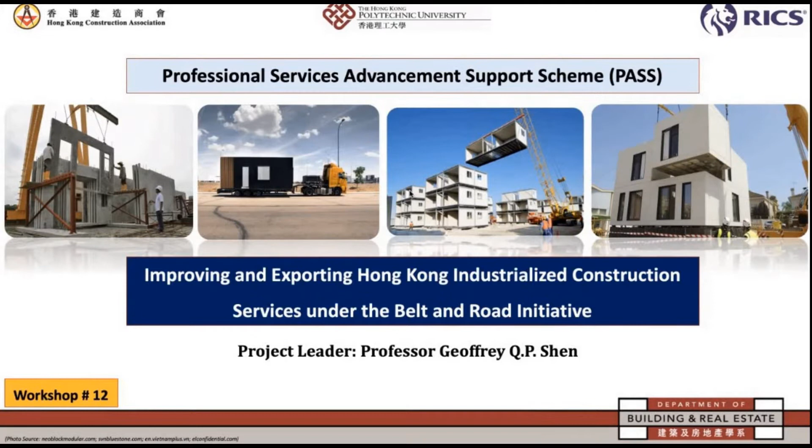This project is funded by the Professional Service Advancement Support Scheme of the Hong Kong SAR government. It aims to improve and export Hong Kong's industrialized construction service under the Belt and Road Initiative. It is sponsored by the Hong Kong Construction Association and supported by RICS. The aim is to enhance the competitiveness of the construction industry in Hong Kong, facilitate integration of various technologies and policies in industrialized construction, and encourage multidisciplinary collaboration in the provision of construction services.

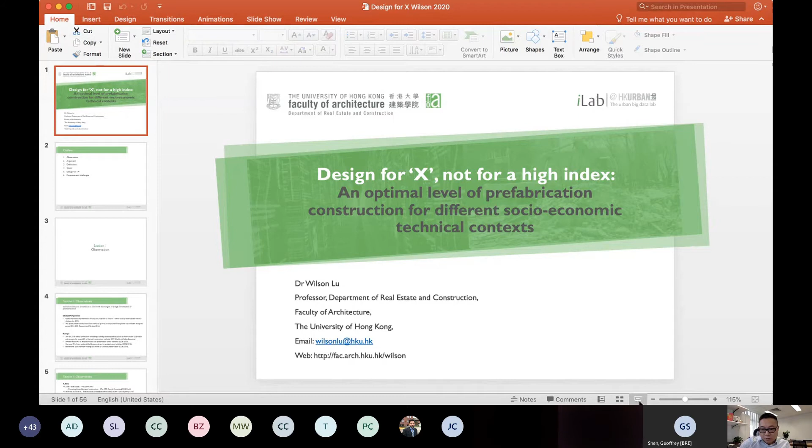Today's topic is something we call 'design for X,' not for a high index — searching for an optimal level of prefabrication construction for different socio-economic and technical contexts.

I presented this about two years ago at PolyU, and since then we have developed this idea into a journal paper, with some further developments I'd like to share with you today.

The outline of my presentation: first, some observations, then the major argument of my presentation. Then we give some definitions and use Hong Kong as a case - Hong Kong's off-site construction, MIC construction. Then I propose something called design for X. This isn't a new idea, but applying it in the construction industry, we feel it needs further research and development. Finally, I will talk about the prospects and challenges.

I don't know whether we can do this in a more interactive way. If it's difficult, I'll save some time for Q&A. So if you have any questions, feel free to raise them in the system, and I'll try to answer.

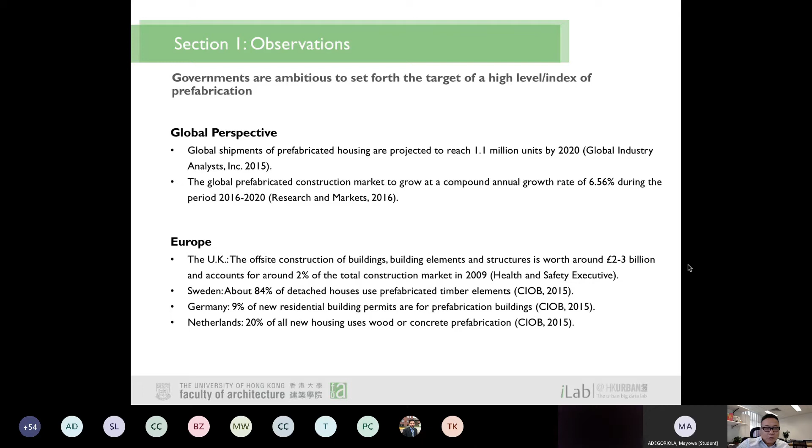And back to Asia, you can see in China, the Beijing central government also issued different circulars to try to promote prefabricated construction. So in a technical note in 2016, it says try to achieve a proportion of 30% of prefabrication construction in new construction projects. In about 10 years, they set up a relatively ambitious index of prefabrication construction. No matter how the 30% is defined, we will talk about this later on.

In Hong Kong, prefabrication is not new, and it has been implemented in public housing since the 1980s. The literature often cites a case that in some of the mock-up or pilot projects, prefabrication has been around 65% of the overall construction. So you can see in Hong Kong, we are also promoting a kind of high index. Although it is not clearly mentioned, in people's mindset, you try to achieve a higher index of prefabrication. It sounds like the higher the better.

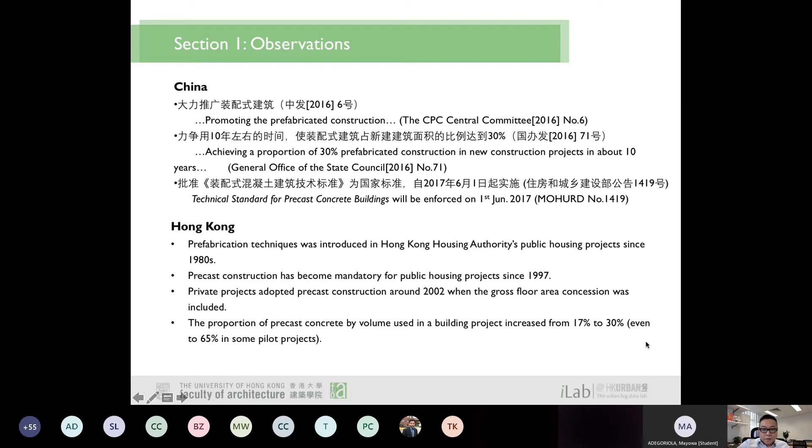So you also notice different plans in Singapore. Singapore is even higher in terms of the plan for prefabrication. For example, the prefabrication level for public sector projects, measured by GFA, has increased from 30% to 50% during 2013 to 2015. So 50% of the GFA was constructed using prefabrication in Singapore.

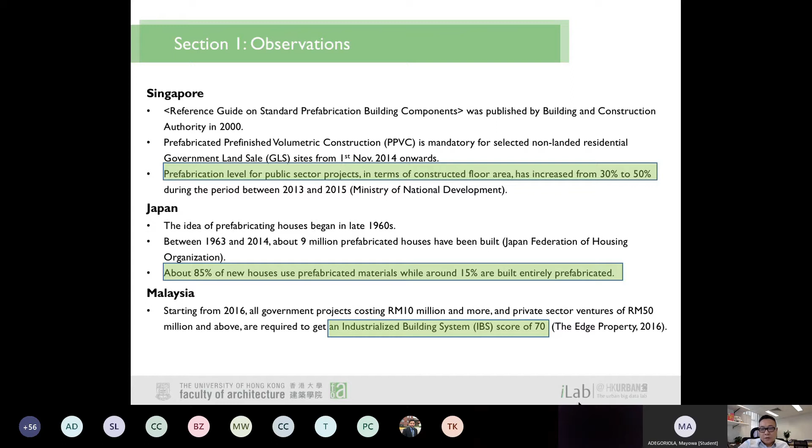You can also see a very high level of prefabrication in Malaysia. They are adopting an industrialized building system. They have their own scores, but it seems they are also trying to promote a higher index of prefabrication. Besides the governments, the practitioners and the industries, academia is also joining to advocate a higher level of prefabrication. We did some brief literature review, and we can spot in different papers and publications authors trying to promote a high level of prefabrication.

We often hear about an arms race, but it sounds like a prefabrication race is on the rise across the global construction industry. That is the observation I want to highlight with you. My argument is the prefabrication level is not the higher the better. I want to refute, I want to attack this prefabrication race. I want to argue prefabrication level is not the higher the better.

There should be some optimal level of prefabrication suitable to a certain socio-economic technical context. So you have different countries, different economies with different socio-economic backgrounds, different technical capacity, different policy and institutional arrangements. So for a certain context, there must be an optimal level of prefabrication. Now the issue is how to search for such an optimal level of prefabrication.

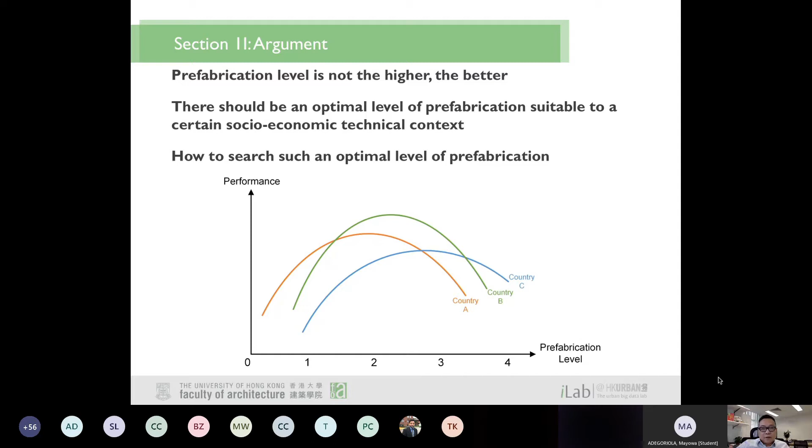Definitions. You probably have heard different definitions related to prefabrication. Actually, the terminology is becoming rather complicated. For example, you probably have heard of prefabrication and precast. In Hong Kong, in the Greater Bay Area, in the Pearl River Delta, precast is very popular. And the latest heated term in Hong Kong is MiC, modular integrated construction. In the literature, you must have heard about off-site construction, and some researchers and practitioners also mention industrialization. So what on earth are these terms?

So I try to provide some definitions. They are not necessarily the only definitions. For example, precast is a construction product, mostly concrete, produced by casting concrete in a mold or form, cured in a controlled environment, then transported to the construction site and lifted into place. So it's more like a construction product, like a slab, a facade, a partition wall, and even more complicated or volumetric precast products.

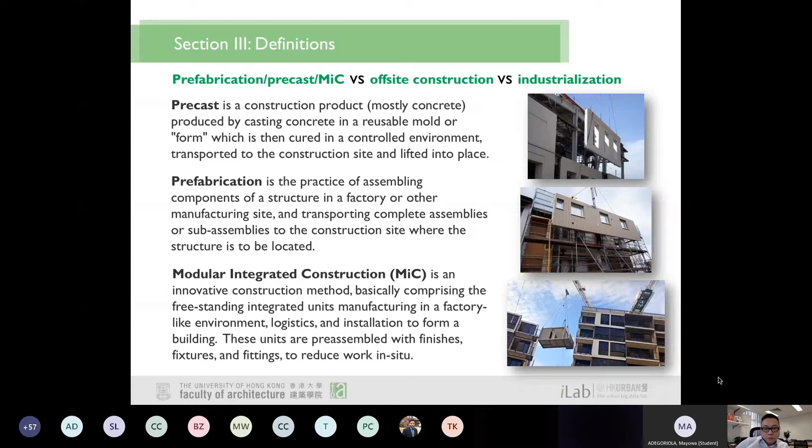You must have heard about offsite. Actually, offsite is very popular nowadays, particularly preferred by Professor Gibb from Loughborough University. Offsite construction refers to structures or components of a building or of a structure built at a different location. It is not on-site, it's off-site, different locations other than the location of use.

It could be individual modules of the buildings are constructed in a factory in the Pearl River Delta and then transported to the site for assembly to a final building in Hong Kong. Off-site, I think this is contrasting with on-site, and then industrialization.

So it includes the extensive use of prefabricated, factory finished, large-sized elements, and the conversion of the production into a mechanized and continuous flow. I think this is a major shift from traditional projects to products, manufactured in an industrialized way. Okay?

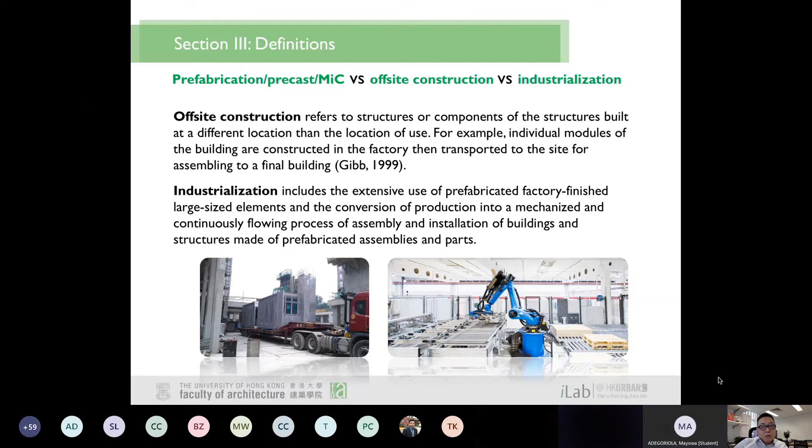So I hope you are still with me. After I present some of the concepts, what I want to point out is actually these ideas are not mutually exclusive with each other. They just emphasize different aspects. For example, offsite. Very often people equate offsite construction with prefabrication. Actually, prefabrication can also be on-site.

Have you ever encountered some on-site prefabrication? Actually, for some infrastructure projects like a road, or an express railway, because the site is very long, sometimes you have the space to pre-cast the components on site, and then hoist and install them. Actually, that is prefabrication, but it's on site. So don't equate off-site construction with prefabrication.

There is some on-site construction as well. So prefabrication and precast could be pointing to the same thing. Prefabrication or precast could be organized in an industrialized way. MIC is also a certain way of prefabrication. You prefabricate the units off-site, or sometimes you prefabricate something on-site. So you understand the different concepts, and they just emphasize different aspects.

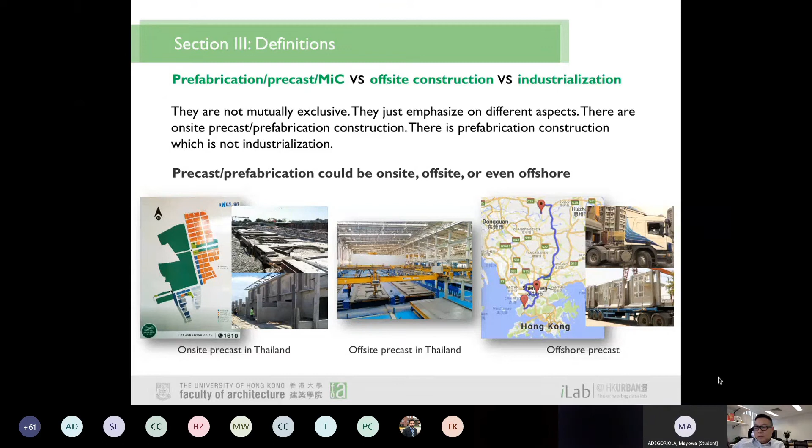So industrialization normally involves precast or prefabrication. It could be off-site, it could be offshore, but it could be on-site. Later on, I will show you some other cases. This is on-site prefabrication.

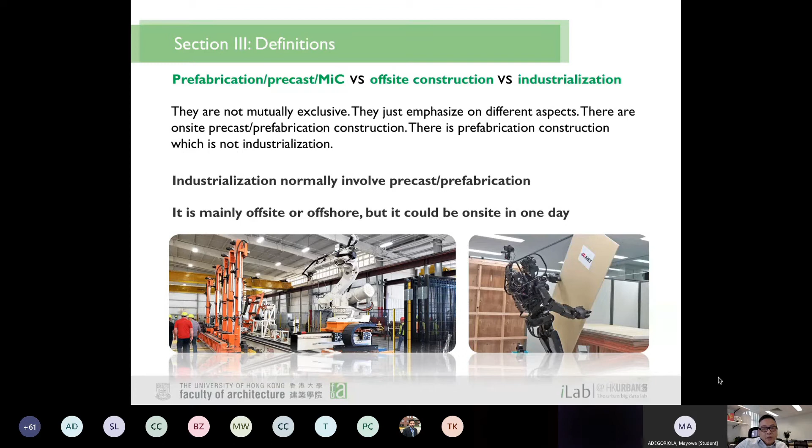Now, after we understand the definitions, we look at the prefabrication level. There are different researchers trying to define different prefabrication levels. For example, this one, I cannot pronounce his name properly, in 2006: it can be measured by the ratio of value of the work done. For example, the whole building is 1 billion, and a certain ratio of the value is done by prefabrication. People can use that as an index, as a level of prefabrication. It could also be the CFA, or even the weight of the precast versus on-site concrete.

Sierra and Zamora in 2013 defined different levels, like a basic level, LP0, completely work on-site. That is cast in situ. We set up some formwork, cast concrete in, wait for its curing, and then dismantle the formwork. That's very traditional cast in situ, and even nowadays this is still popular, even though concrete has arguably been invented by the Italians 2,000 years ago. Then you have an initial level, an advanced level, and the integral level.

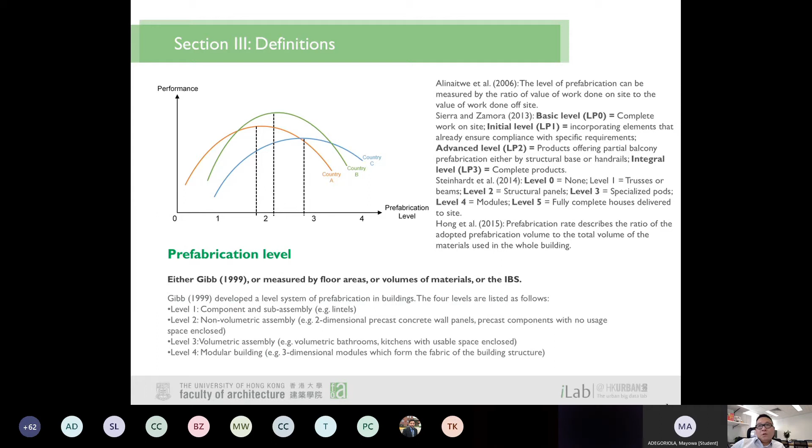Level 3 is called volumetric assembly. You have some units, like bathrooms and kitchens; it's volumetric, with different hinges and connection points. The difference with level 2 is you have some usable space enclosed already, like a bathroom, although there's no sink, no toilet or other things. Level 4 is the modular building with 3D modules and with some utilities installed already.

In my presentation, I adopt Gibb's definition, levels 0 to 4. But you are encouraged to remember that there are other definitions of prefabrication level. Some use the GFA, some use the CFA, some use the volume of materials, or even the IBS, or even the weight of the materials. Actually, there's a rule of thumb formula to convert the volume of materials to the weight of the materials, or even the value of the materials.

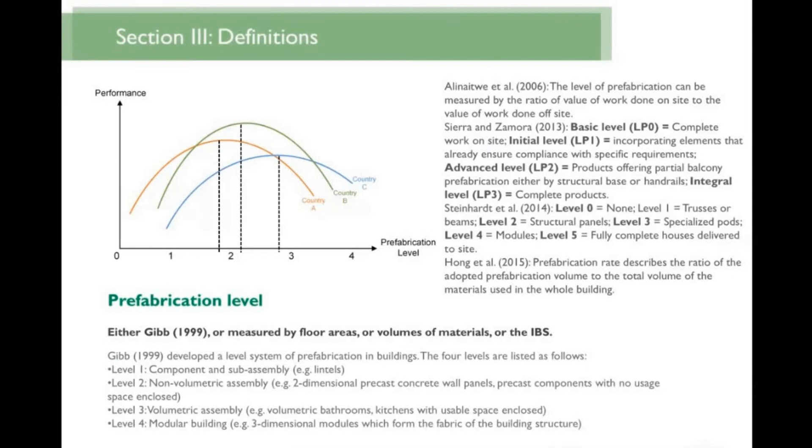Now, performance, vertical bar, performance. Obviously, performance means different things to different people, so it's a multi-faceted concept. You can examine this from productivity, buildability, manufacturability, assembly, sustainability, cost, maintenance, recycle, reuse. All these aspects can be considered as performance.

So now my argument is that you have different levels of prefabrication. You can refer to Gibbs' definition, and then for different contexts, a socio-economic and a technical context, different levels of prefabrication actually give you different performance. So it's not necessarily the higher, like level 4, that must be the best for this context. So it is important for a certain context to search for an optimal level of prefabrication, so as to achieve the optimal or best performance.

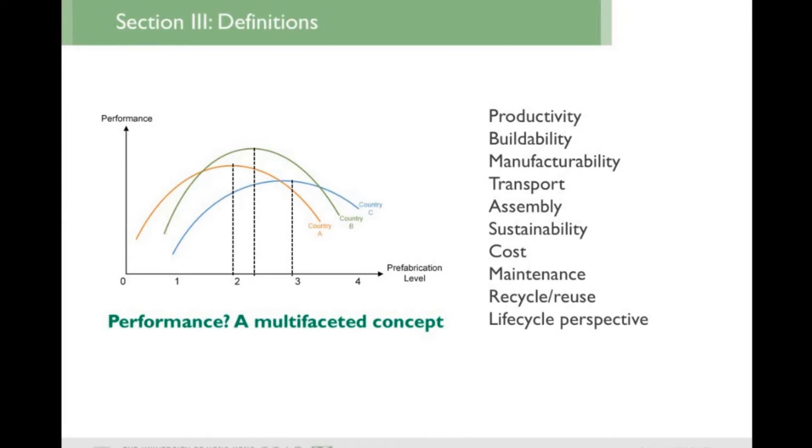In terms of public housing, in Hong Kong we have two big categories. One is called PRH, public rental housing. Around 30% of all the units are PRH units. And then around 15% are subsidized housing. These are for the so-called sandwich class. Your income is not high enough to afford the private flats, but your income is higher than some other class, so you are not eligible for public rental.

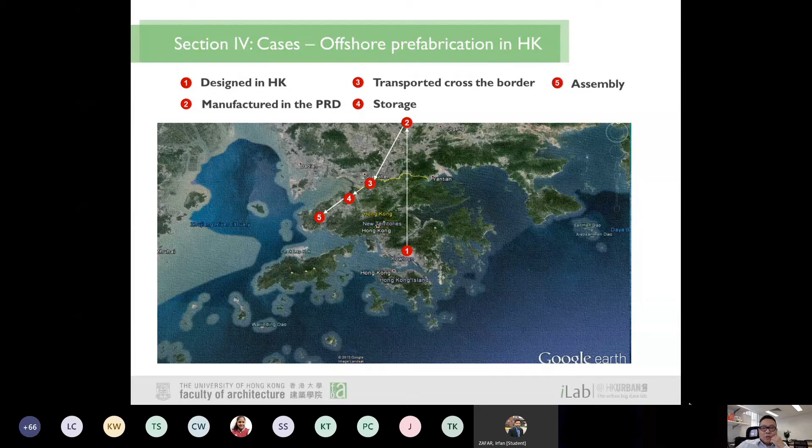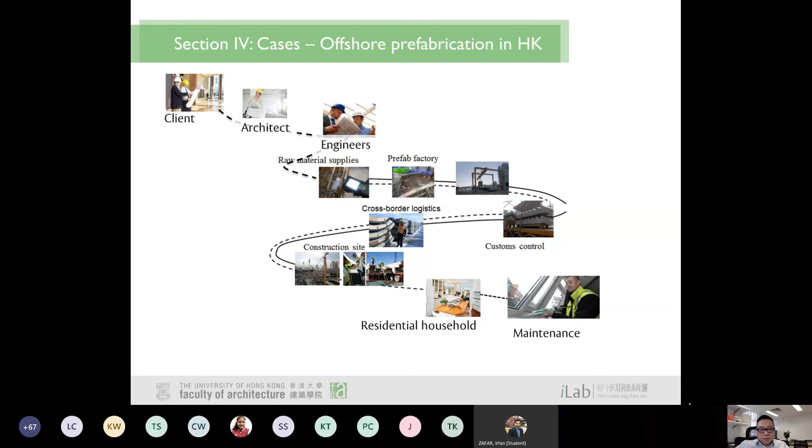Okay, so if you look at this cross-border offshore prefabrication, you can see the different stakeholders involved in different places, different processes. So over the past years, actually, I visited most of the prefabrication factories supplying Hong Kong. They are mainly in the Pearl River Delta. I visited factories with some other professors, including Professor Geoffrey Shen.

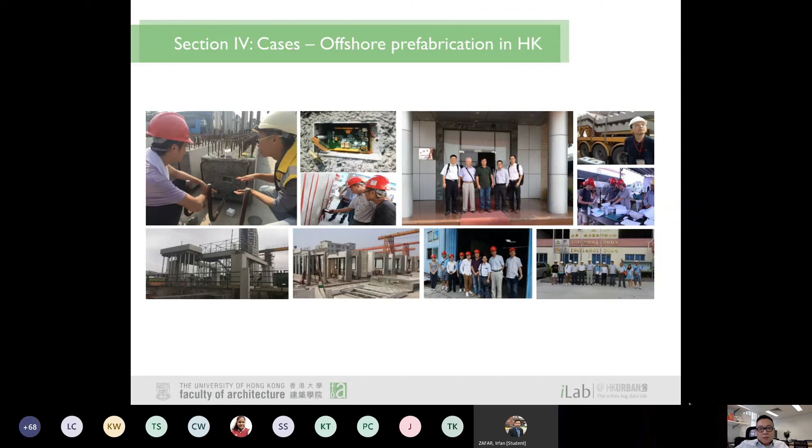Actually, in 2014, we applied for a research grant called RFID-enabled BIM for prefabrication housing production in Hong Kong. So the topic is prefabrication. Prefabrication is mainly used in housing projects, mainly by the public sector, but nowadays the private sector is also using prefabrication. So this kind of logistics and supply chain is becoming very sophisticated. And then we try to develop a platform using RFID, the auto ID technology, and BIM to enhance logistics and supply chain for this process.

So we compare prefabrication. Like we probably know that cast in situ has some pros and cons. Also, actually, prefabrication has some pros and cons. Cast in situ's site safety record is rather poor in Hong Kong. Around 25 construction workers were killed every year on site by all sorts of accidents. 25 fatalities is not really acceptable.

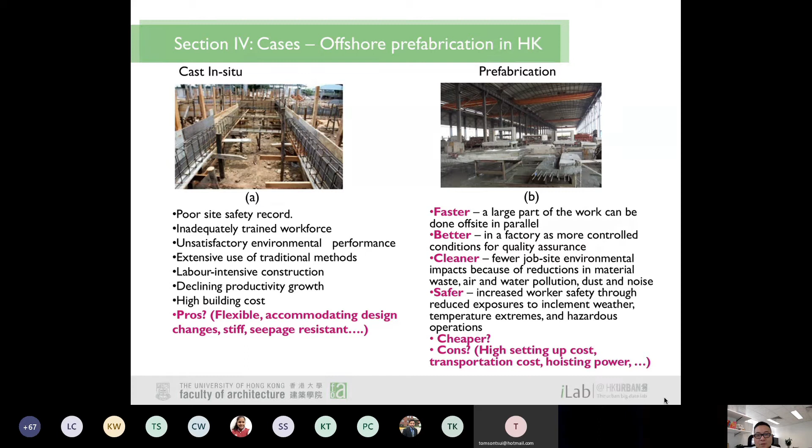Last time in a pilot project, a single piece of precast external wall weighed as much as 7.5 tons. To hoist that piece of precast component, you actually need some extra hoisting power. So the strengths and weaknesses of cast in situ and prefabrication have been touched upon in different literature already.

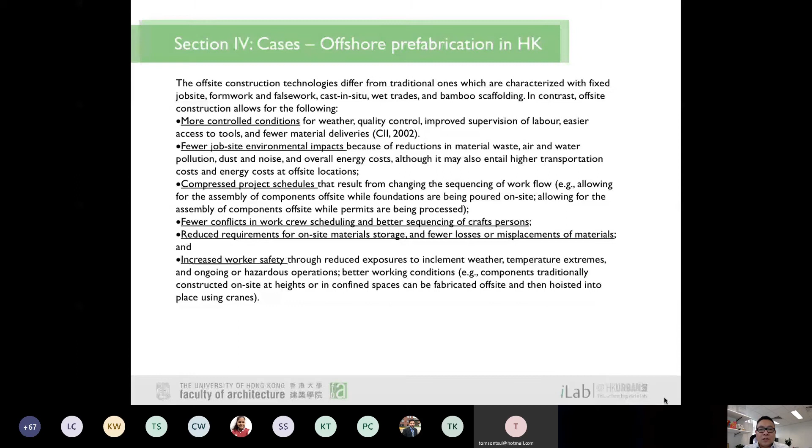As I mentioned, although off-site construction or offshore construction has different benefits, there are also some shortcomings. So some still prefer traditional cast-in-situ construction. Therefore, the Hong Kong government and its departments devised different institutional arrangements to encourage prefabrication.

For example, in 2001, I guess, government departments including the Buildings Department, Lands Department, and Planning Department issued joint practice notes, actually Joint Practice Notes 1 and 2. In the JPNs, they said building developers could receive GFA exemptions if they adopt some green building technologies, including prefabrication. That's a big incentive.

That's a big incentive. So as a developer, I see that prefabrication is more expensive and a bit inconvenient, but now the government issued the incentive that I can have some GFA exemptions if I adopt prefabrication. That's the carrot given by the government. I must say this incentive has been abused a little bit. Developers just make use of it to increase their GFA exemptions. So it went too far.

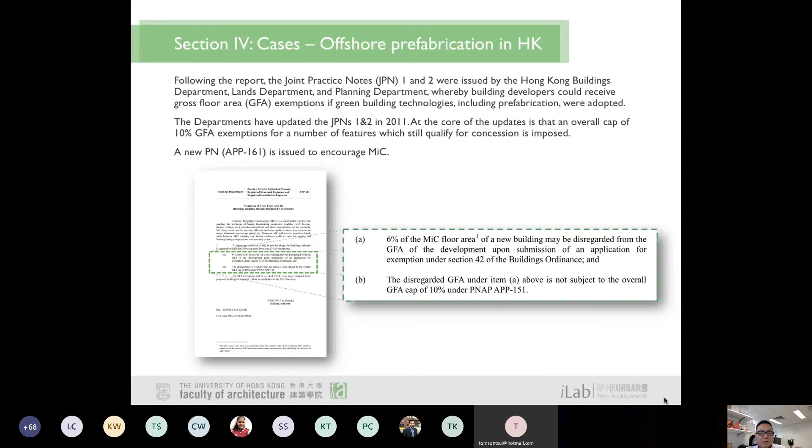So offshore prefabrication in Hong Kong. Some of the photos were shot by us, some we found on the internet. These are the major prefabricated precast components used in Hong Kong. The first one, A, is a precast facade. Interestingly, some of the windows, washing benches, and sinks were pre-installed as well. So in terms of a facade, this is quite a high level of prefabrication, but still it's not volumetric.

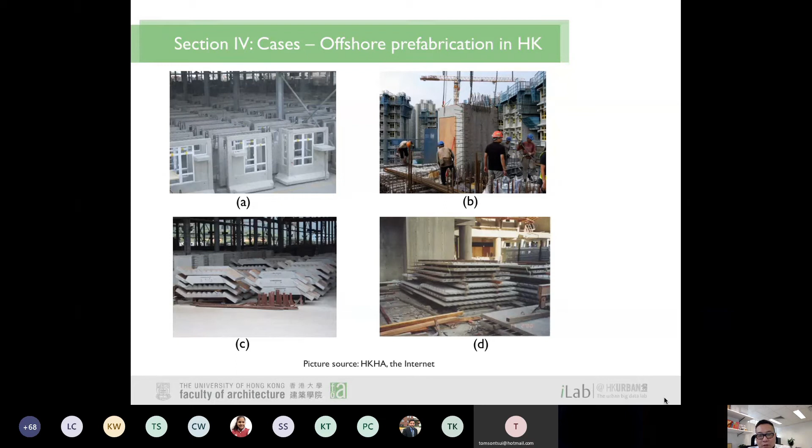If you look at B, that is a volumetric bathroom, so you have a 3D enclosure there. C is a precast staircase, and D is the lower level of precast slabs. So it's actually semi-precast, and then you can put another layer of concrete on it.

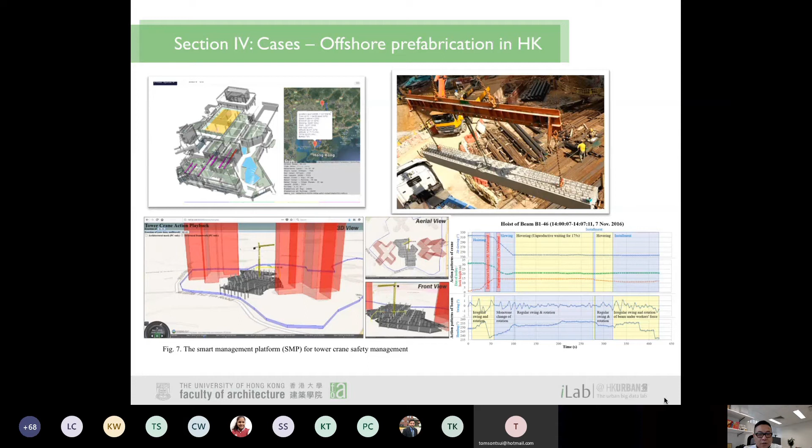Okay, we steal this from the housing authority. In Hong Kong, for a typical layer floor of public housing, they use a 6-day cycle. That means they use 6 days to build the central core and then install the components into position.

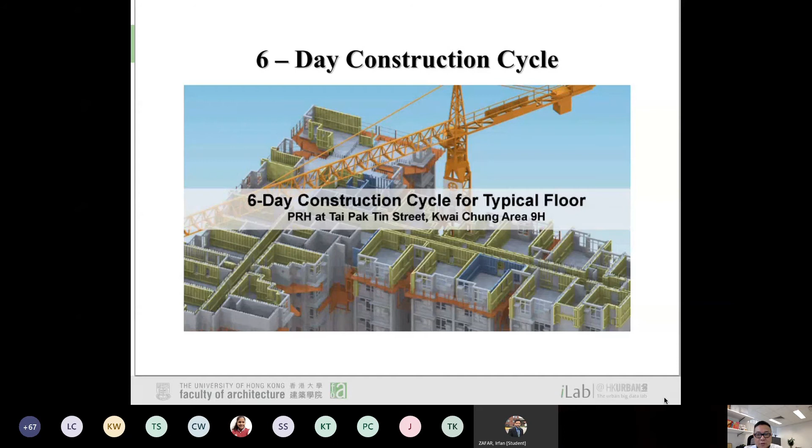That's the prefabrication. You can see in Hong Kong, Housing Authority has adopted different levels of prefabrication: volumetric kitchen, volumetric bathroom, staircase, facade, slab, and some other things. But now the latest, most popular thing is MiC, modular integrated construction.

So I'll give you some definitions early on. These are freestanding, 3D freestanding volumetric modules, but with some prefabricated and pre-finished components. Some of the furniture, some of the beds, some of the things have been installed in the modules already, all off-site in a controlled environment.

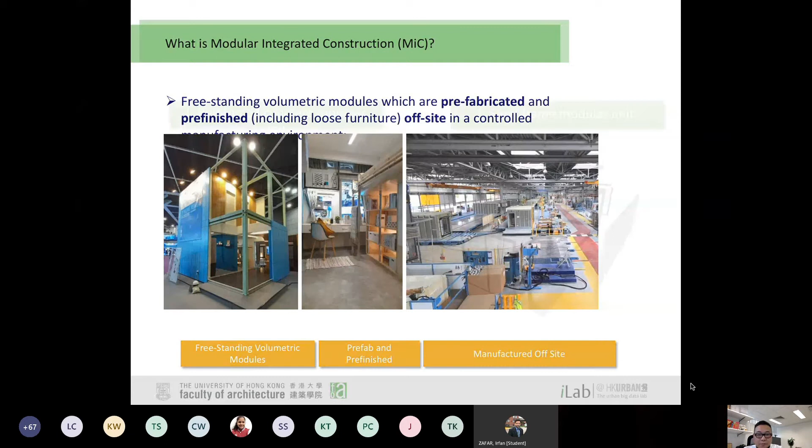So it's really something. Also some other typical type is a steel frame modular unit - you have the steel frame, which is more expensive, like steel structure is more expensive, but the advantage is it's lighter than the concrete modular.

And in Hong Kong, developers and clients are very clever - they can do some hybrid modular units, so like steel frame, but then cast with some other concrete, making it relatively balanced between the price, the technicals, and also the weight.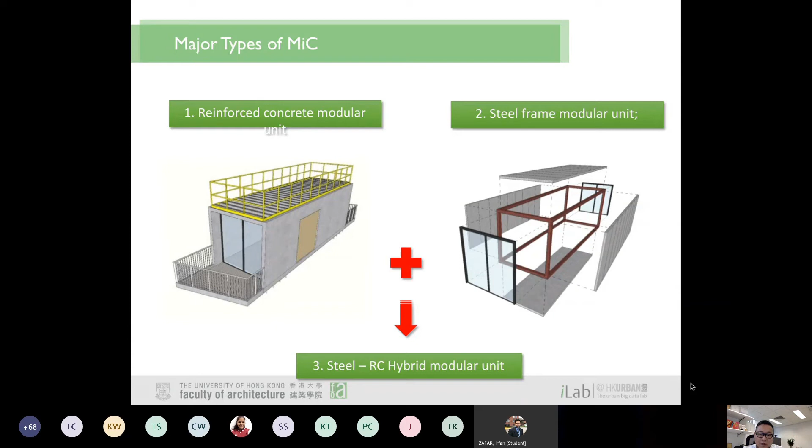You need to consider the design aspects like repetitive units. You need to think about the layout of the site. You have to consider the statutory requirements, and then incorporate all these considerations into a design, and the site locations.

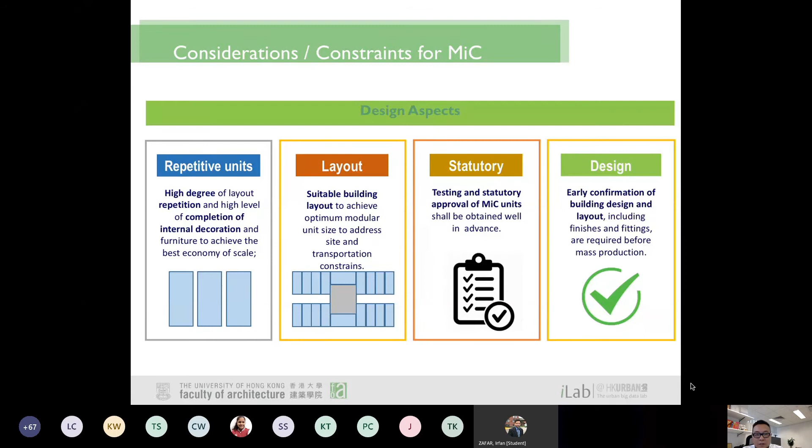And also now the sizes are bigger, so traffic impacts are also an issue, along with the delivery route. So you have some components in Foshan, in Dongguan and somewhere, and deliver them - now these are bigger units. How to plan the delivery route is really something, an issue you need to consider.

And then the lifting power, so adequate site space for modular units and lift operation. I actually guided a group of Swedish experts to our Hong Kong Housing Authority to visit them, because in Sweden they are also quite strong in prefabrication, although they use a lot of wood structure for some buildings.

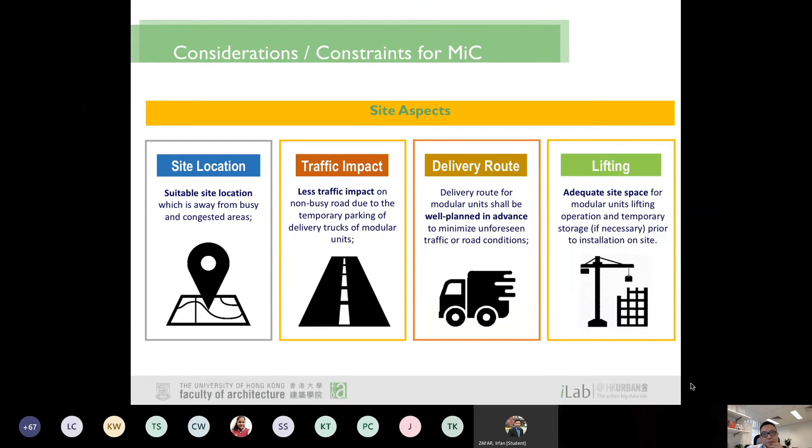A particular point mentioned by the practitioners in Hong Kong is the lifting power is still an issue as seen by them. So by considering all these constraints or the parameters of a setting, like in Hong Kong, you need to...

I actually decompose all these considerations into 4 aspects: political, economical, social, and technical aspects. For example, in political, you need to consider the policies, GFA exemptions, standards, British standard, codes, guidelines, statutory requirements. These are very critical for the adoption of different levels of prefabrication, either it's precast, volumetric, or MIC.

Economic considerations - you need to consider supply. Actually, when Hong Kong tried to adopt MIC, clients and main contractors searched around - there's no contractor in Hong Kong able to supply the MIC, so they have to go to mainland China. Mainland China is very good, you have a whole spectrum for materials supplied, but different companies still have different capacity to do this schedule.

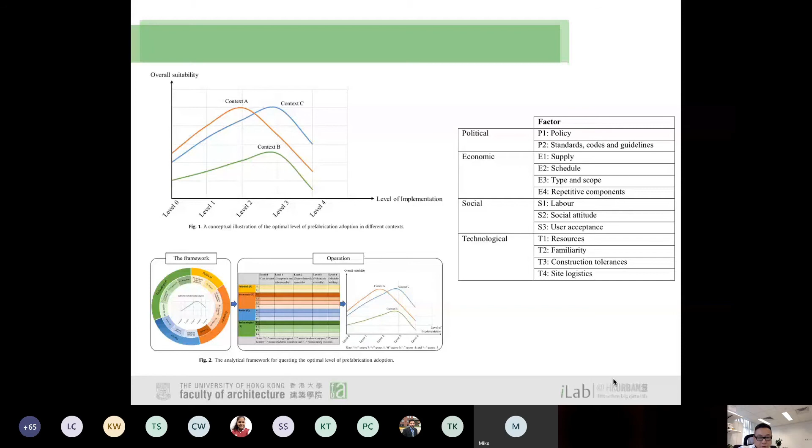Also for MIC, we have some other considerations. For different considerations, we try to give a score to different levels of prefabrication - in terms of cast in-situ, in terms of components and sub-assembly, in terms of non-volumetric or volumetric assembly, and in terms of MIC.

We check all the PEST conditions against Hong Kong's conditions, Hong Kong's context, and then we score in this way. We use 2+, for example, to indicate a higher score. 1+ means relatively higher score, 0 means neutral, and minus means a much lower score.

For example, we look at volumetric assembly or modular integrated building. You can notice in Hong Kong now the policy side is very encouraging for level 3 and level 4. By having all these, we have a total score, and we plot that total score in a 2D coordinate system, deriving the figure on the right-hand side.

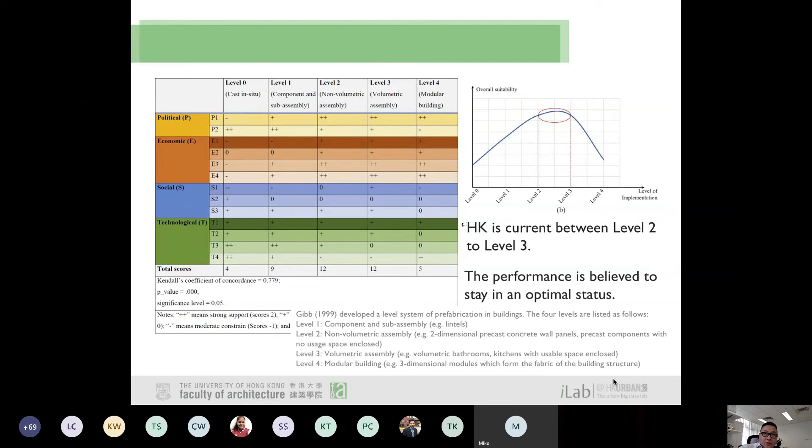But right now it's not really ready. So my argument is not against the government's strategy of promoting MIC, but we should point out that higher is not always better, and we should work towards a better context for harnessing a higher level of prefabrication. That's basically my argument - I'm not against MIC, just arguing for a nuanced approach.

I also proposed something called Design for X. Design for X is not really something new - you've probably heard the popular term Design for Manufacturing and Assembly, DFMA. Actually, this has already been considered in the prefabrication industry in Hong Kong.

So why does it come up with a semi-precast slab? Why does it come to a facade with sinks and windows installed? Why does it come to a volumetric kitchen or bathroom? It's basically optimal for manufacturing and assembly - it's also an optimal level, called optimization for supply chain.

So, for example, if it's too big, you have a problem of route planning and also using your long vehicles to transport things from mainland China to here. If it's too sizable, you have to consider supply chain optimization when you do this design. In logistics and supply chain management, they have a term called shipping air.

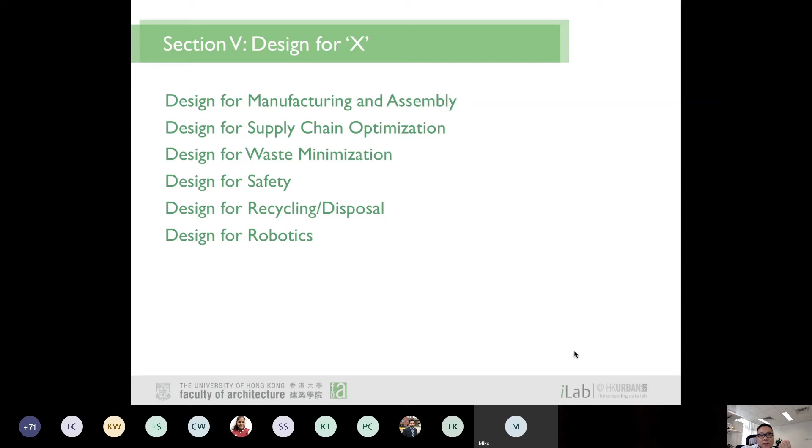Actually, in my team, I now consciously recruit PhD students to look at this design for X. We have published a few papers, and we have some PhD students working on this, like design for DFMA, which is very popular, particularly in the UK.

We published a paper to examine this in the curtain wall system in Wuhan. I guess this project is in Wuhan. Curtain wall is always difficult. It always lies on the critical path of a project. So whether it is possible to design the curtain wall in a more optimal way, so it can be better for manufacturing, also for assembly.

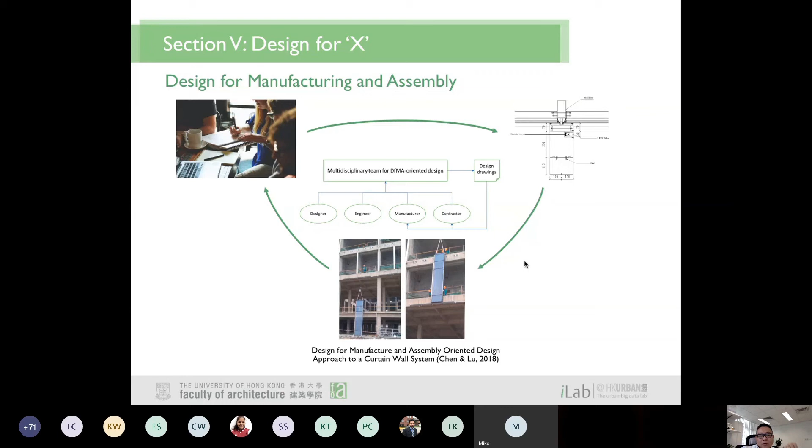This is a few examples of DFMA, like offshore, not only offsite. Now it's also prefabricated in the offshore area. If you look at the Bird Nest project, actually it was also a very typical prefabrication. The external structure is actually manufactured somewhere in Shanghai, and then prefabricated, and then transported to Beijing through the sea.

Second example is the flagship Apple shop in Central. Clients mentioned to us that a single piece of the glass is a really beautiful design. Apple is using very beautiful design. The single piece of glass there is worth 1 million Hong Kong dollars. Most of them in this project are manufactured in Tianjin and then transported to Hong Kong. So how to consider the manufacturing and also the size of the panel, and then later for transportation and assembly, is something you have to consider.

So now in design, you not only think about traditional functionalities and aesthetics, but you also need to consider the buildability, manufacturing, and assembly.

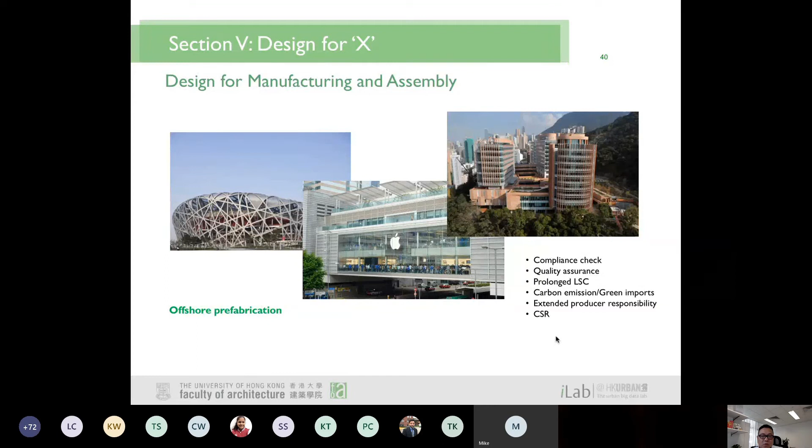Another example we mentioned is recently the DFMA of the airport sky bridge. Some facts and figures about the project: it's also manufactured and prefabricated in Zhongshan, Guangdong province, and then precast somewhere at the airport. At the airport, they are doing a lot of land reclamation to have space for the mock-up and pre-assembly, and then this huge, massive prefabrication component structure was transported - 5,000 tons - to the current site for installation.

And inside Hong Kong, a lot of footbridges are using this. I think in PolyU, the footbridges perhaps use similar things. You have to consider the manufacturing and the assembly.

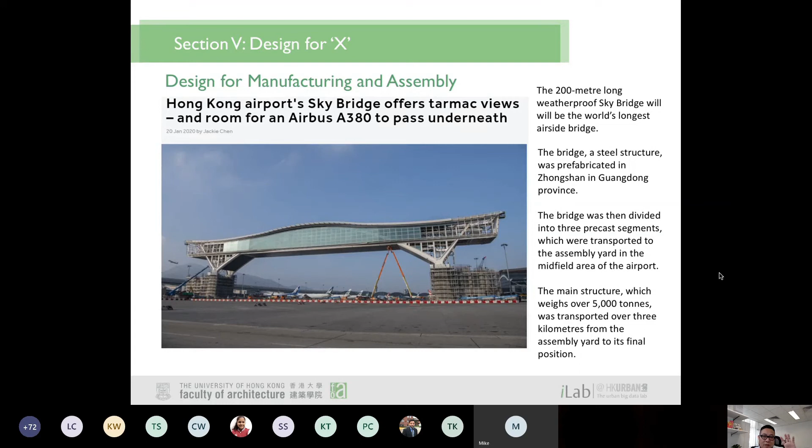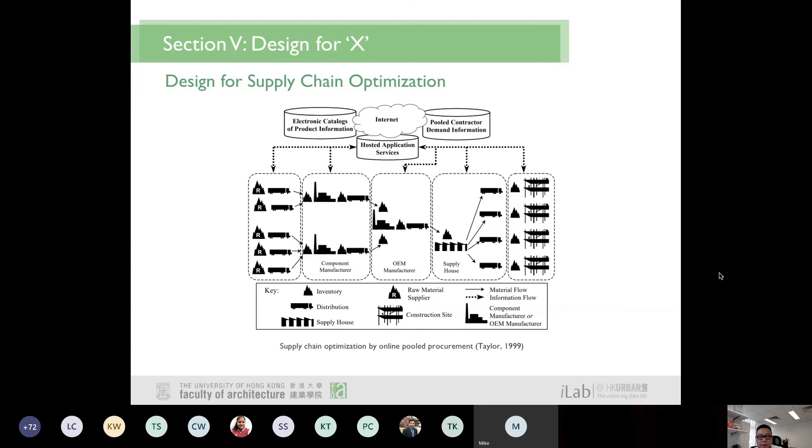Supply chain optimization - over the years, we have spent a lot of time to understand the supply chain and logistics for prefabrication housing between the Greater Bay Area. Waste minimization - I also do some research on construction waste management. So recently we are asking one of my PhD students to look at how prefabrication and design can help minimize waste.

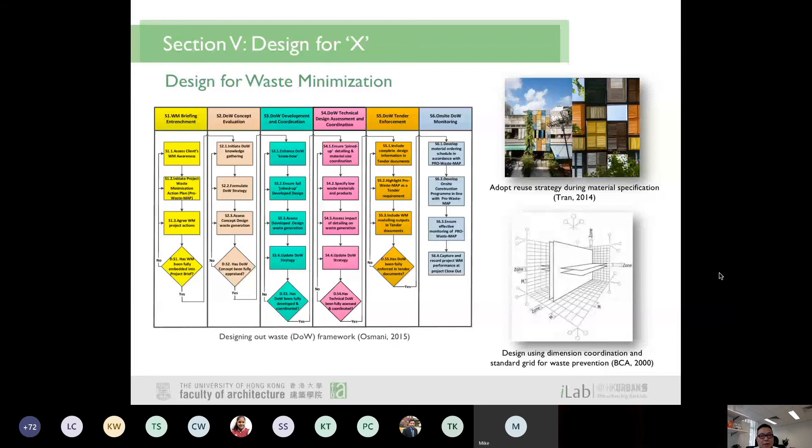For your information, in Hong Kong, about 25% of the landfill waste is actually generated by construction, a single industry only. So we have to consider this construction industry in terms of waste management, in terms of reducing the impact to the environment. Also for recycling and disposal, okay? We learn from the manufacturing industry, we learn from Japanese practice, and try to incorporate all this.

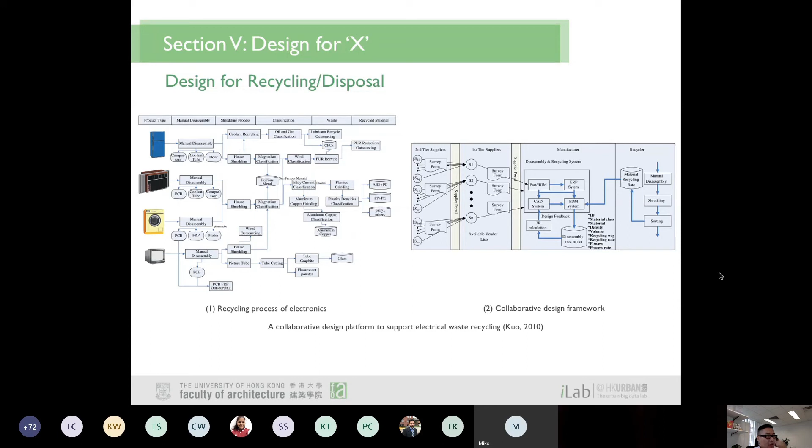Design for safety, we are also interested in this area. Like in Hong Kong, you have a lot of openings. If the openings on different floors are not properly designed out or not properly enclosed, they will cause a lot of safety issues, particularly falling from height. So how can design incorporate all these issues to help improve the poor occupational health and safety record in construction?

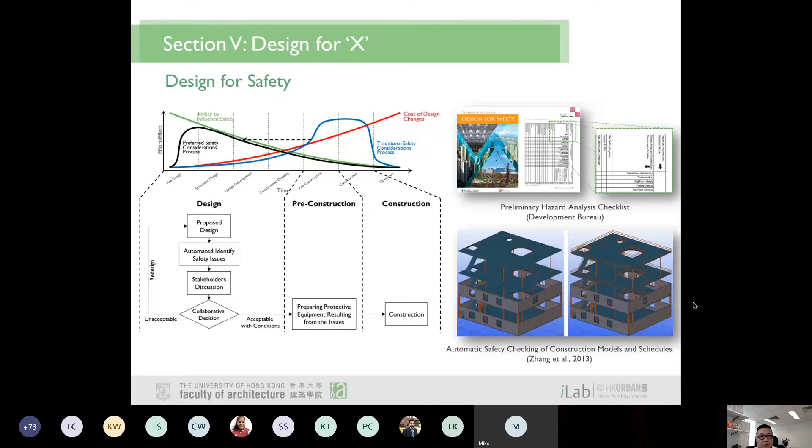Design for robotics. This I copied from Thomas Bock's report to Hong Kong's Construction Industry Council. He came to Hong Kong and did a consultation. His major proposition is if you want to harness the power of robotics, at the design stage you need to consider the projects already. For example, if I understand correctly, he proposed that at some upper level you have some precast components on site, and then use machinery and robotics to hoist them, to handle them. The report is available online, so if you are interested, you may search for it.

So anyway, the X here stands for excellence and for expanding aspects. Traditionally manufacturing and assembly, but now we expand to waste management, safety, robotics, and some other aspects.

This slide I stole from the speakers yesterday. So in Hong Kong, there is a student residence at Wong Chuk Hang in the south part of Hong Kong Island. That's an iconic project using MIC, modular integrated construction. As I mentioned, in Hong Kong we are not really ready for MIC. So they had to consider a lot of things in harnessing the power of MIC. For example, they considered the repetitive units in this HKU project. I started to be involved in this project.

So they actually have 1,224 student places, units, to be produced as modules using MIC. More than 1,000 units, that can actually have some economy of scale, isn't it? And then compact. The design for HKU is a maximum length of 8.4 meters, the width is 2.5 meters, and the height, if I remember correctly, is 3.1 meters.

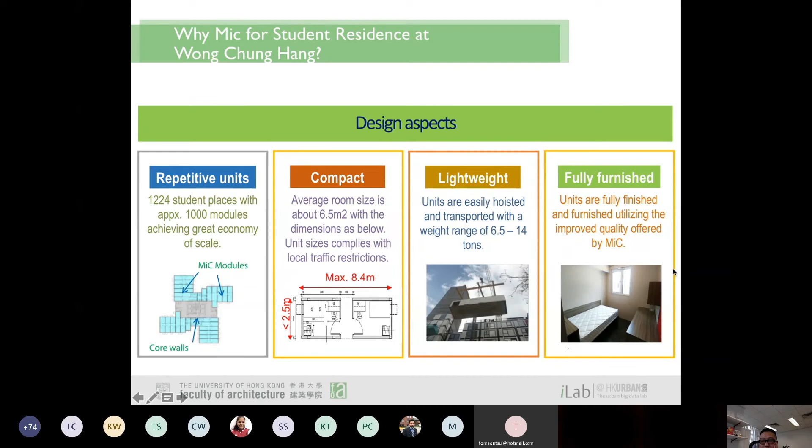Prospects and challenges. So we are still designing more for excellence. The sky is the limit. We encourage designers to think of more aspects by working with the downstream stakeholders, suppliers, contractors, and FM managers. So you have integrated design, but you need to consider a trade-off or optimization between the different aspects. Unlikely you can achieve a design for all the aspects. You may design well for MA or supply chain, but it may not be so good for waste minimization, safety, recycling, or robotics. So as usual, you need to strike a balance among these excellence aspects.

Amenable institutional arrangements, like joint practice notes or the incentive of GFA exemption, have over the years encouraged the adoption of prefabrication. And now they change this to suit MIC. But even so, as reflected by practitioners and clients, a lot of statutory requirements are still lagging behind the requirements of MIC. For example, yesterday the CEO of a main contractor mentioned the installation work takes 2 or 3 days, but it took him 4 to 6 weeks to obtain building approval from the government. The Buildings Department in Hong Kong often plays safe and abides by the old building ordinance. So the statutory requirements need to be modified, updated to suit higher levels of prefabrication.

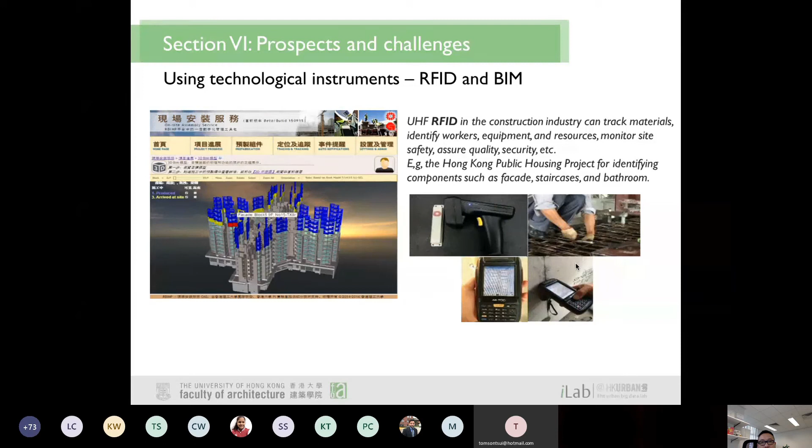So using technological instruments also has a lot of prospects. This is a technology developed by us. We are quite ambitious to turn some traditional components, machinery, and on-site objects into something called smart construction objects. Okay? Smart construction objects. So traditionally very heavy components, modules now become smart. They have different smart properties. For example, they have awareness.

Can you imagine a module, a tie beam, now has its own awareness? It can realize where it is. Okay, I'm just coming out from this factory and crossing the border and arriving on the site. I've been installed. Actually, now using our smart technology, we enabled these components with smart properties like awareness. Now, we only say a human being has awareness. Now we enable these components with awareness. Actually, it's not difficult to realize.

For example, you use a GPS, and when the GPS exceeds like 100 meters outside of the factory boundary, it can tell, okay, now I'm out of the factory and on the way to Hong Kong. So when the GPS is falling in a certain degree around the border, it can initiate the customs clearance automatically. It has its own awareness, and also has its autonomy, and it can communicate. The components can communicate with each other, can communicate with human decision makers.

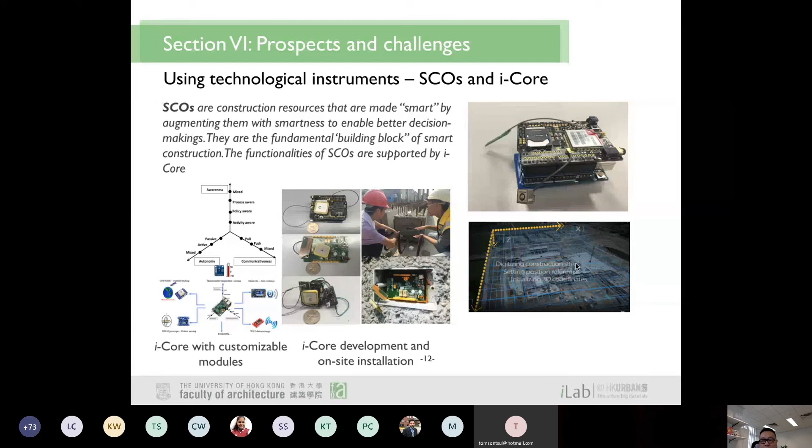So we define the 3 core properties of a smart construction object, and then of course technically we use different technologies like GPS, thermal, Wi-Fi, different components, gyroscope and motion sensors to create all these new properties. We embed all this in something on the right side. This is called iCore. So we test these new technologies on site.

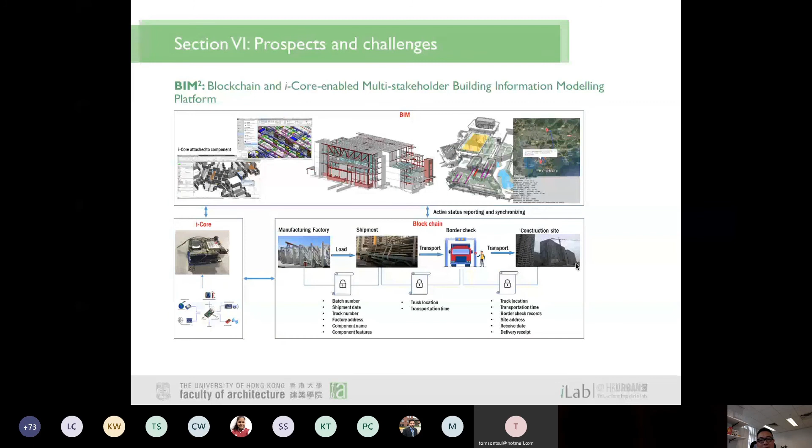And recently, I'm quite interested in using blockchain. Actually, we are going to secure a research project to look at cross-border logistics and the supply chain. Traditionally we use BIM, we use iCore, but now we add a new layer of blockchain. Most of the necessary information to prove the originality of the materials, originality of the components, and positions, status, all these things will be put in a blockchain. So the information cannot be mutated, cannot be tampered or changed unless there is consensus by all the parties. So blockchain is used as a lower level distributed database technology. We try to secure all the necessary key information.

And also a lot of challenges for prefabrication, particularly for offshore prefabrication, because now there is kind of a backlash of globalization, triggered by the protectionism in Trump's government and some other governments. So traditionally, in very old times, we used local materials, local labor, but then gradually we sourced all these resources across different countries, across the One Belt, One Road. And now people are thinking of de-globalization. There's a backlash of globalization, even accelerated by COVID-19.

For example, normally for Hong Kong's clients, for the components, we often send inspection teams to mainland China for quality assurance and inspections. Actually, these teams are not small, often very expensive. So is it possible to use blockchain technology to guarantee the information, guarantee the process, like the glass panel I mentioned, which is very expensive? How to ensure the manufacturing process is up to the standard, and also the components, MIC modules, are ensured? This is really something we need to solve now.

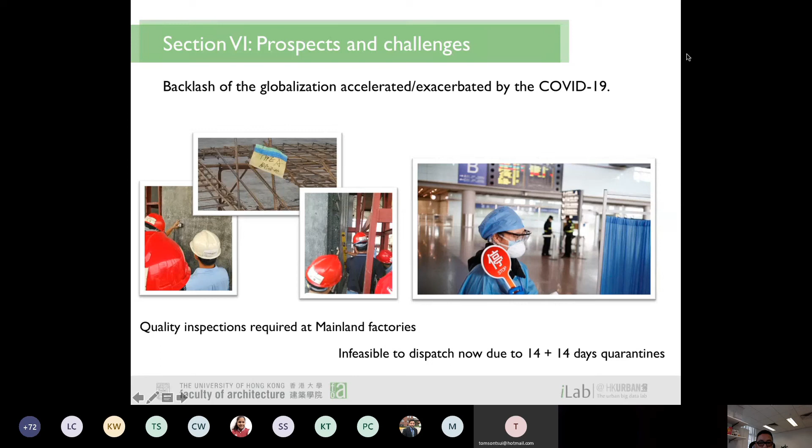And this is the last slide, also about how to source the materials, resources, and construction expertise, machinery across the Belt and Road. Okay, I understand this workshop is about One Belt, One Road. Against this backlash of globalization, it is really a challenge to all of us.